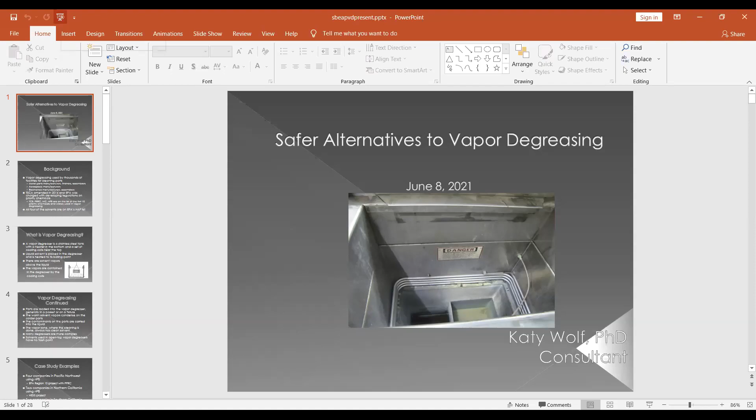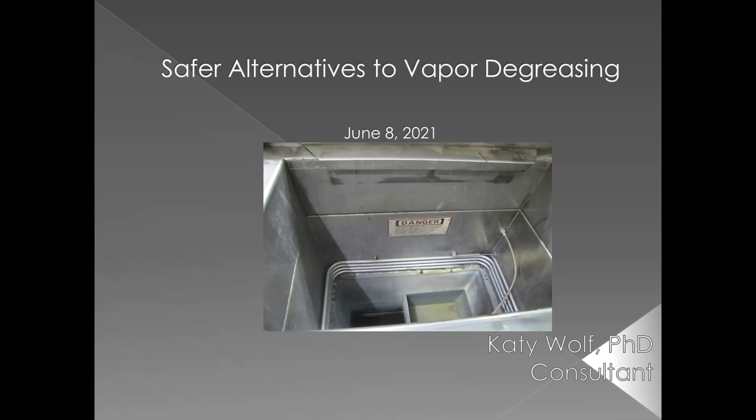So hi everybody. I'm going to talk to you today about safer alternatives to vapor degreasing. Now, vapor degreasing is a process that's used by numerous companies across the country for cleaning their parts. And the dominant industries that rely on vapor degreasing are metal parts manufacturers, finishers, and assemblers, as well as nearly all aerospace manufacturing. And in addition, several electronics manufacturers and assemblers also use vapor degreasing.

Now, in 2016, Congress amended the Toxic Substances Control Act. And under those amendments, EPA was charged with developing a list of chemicals that they believe posed a high risk. And they've developed the list of the first 10 priority chemicals. And on that list are 4 solvents that are extensively used in vapor degreasing.

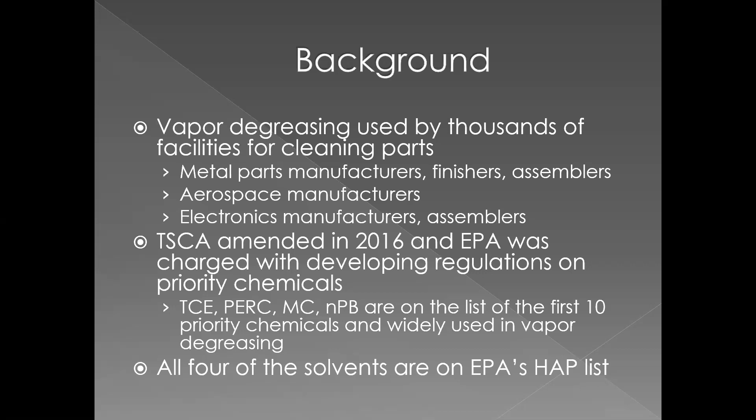These include trichloroethylene, or TCE, perchloroethylene, or PERC, methylene chloride, or MC, and n-propyl bromide, or NPB. And all 4 of these solvents are carcinogens, and they pose other health and environmental effects as well. And all of them are on EPA's hazardous air pollutants list.

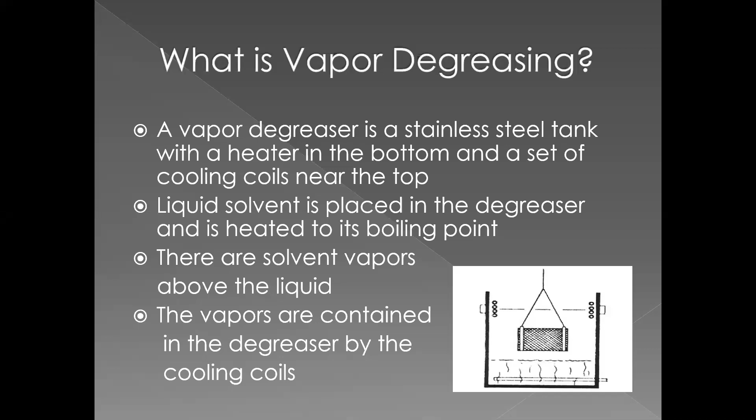Now, how does vapor degreasing work? Well, I'm just showing a simple schematic here, and a vapor degreaser is a stainless steel tank with a heater in the bottom and a set of cooling coils around the top. You put liquid solvent into the vapor degreaser and you heat it to its boiling point. That creates a vapor zone above the liquid zone. Those vapors would tend to escape from the vapor degreaser were it not for the cooling coils around the top, which hold those solvent vapors in them and keep them condensed.

Now you load parts into the vapor degreaser, most often in a basket, but sometimes also on fixtures of various kinds. And when the parts go into the vapor zone, they encounter the warm solvent vapors there. And those vapors condense on the colder parts and they carry the contaminants on them down into the liquid below. And if you always clean in the vapor zone, you'll always be cleaning with clean solvent.

Most degreasers are actually more complex than the simple view that I've given you right there. And almost all vapor degreasers have a spray wand that can be used to spray liquid solvent on the parts in the vapor zone. And in other cases, vapor degreasers will have baths of solvent with agitation of various kinds, and you can immerse the parts in them for better cleaning.

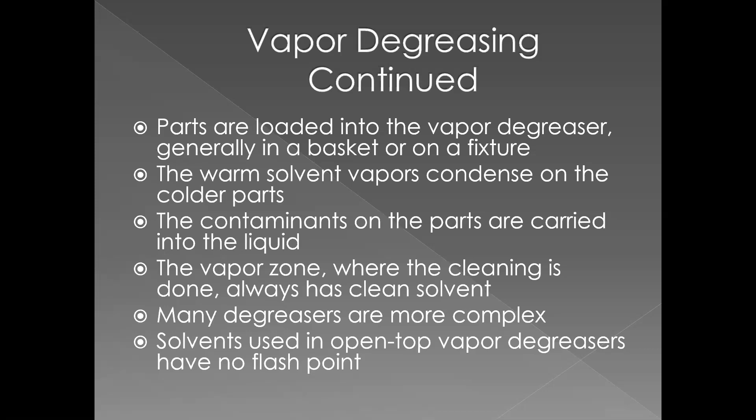Now, this last point is very important, and I want to emphasize it. The solvents that are used in open-top vapor degreasers can't have a flash point. If you heat a solvent to its boiling point and it has a flash point, you'll reach the flash point first. And since we have oxygen present in an open-top degreaser, if we also have a source of ignition, we could ignite that solvent or blow it up. So that's very dangerous. We don't want to use solvents with flash points in vapor degreasers.

Now I'm going to present a number of different case studies. I'm actually living in the Pacific Northwest, no longer in Southern California, and I'm working with 4 companies on a project that's sponsored by EPA Region 10. And I'm working with a nonprofit called the Pollution Prevention Resource Center. All 4 of these companies are using N-propylbromide in a vapor degreaser, and I'm assisting these companies all in converting to safer alternatives.

I'm working with 2 companies on a project sponsored by the Hazard Evaluation System and Information Service, which is part of the California Department of Public Health. And those 2 companies are also using N-propylbromide. Then historically, I ran a nonprofit in Southern California for 30 years, and I worked with a number of companies helping them to convert. And I'm going to present case studies on 2 of those.

Now, before I talk about what the potential alternatives are, I just want to give a historical context to the vapor degreasing process. Right after World War II, a solvent that I already mentioned, trichloroethylene, started being used. And then somewhat later, PERC and methylene chloride started to be used. By the time we hit the mid-1990s, there were 2 ozone depleting solvents, which were also extensively used by industry. These included 1,1,1-trichloroethane or TCA and a chlorofluorocarbon called CFC-113.

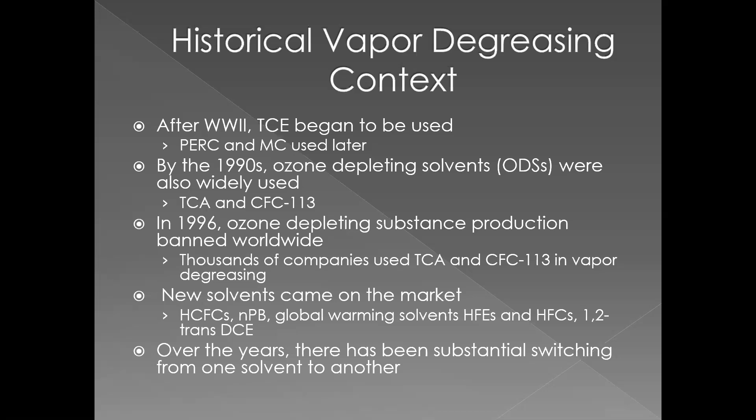Then a little later, some global warming solvents, the hydrofluoroethers and hydrofluorocarbons, came onto the market. And also another chlorinated solvent called 1,2-trans-dichloroethylene. And over the last, I don't know, 35 years, there's been a lot of switching from one solvent to another in vapor degreasing as the solvent that companies are using becomes increasingly regulated.

So what are the potential alternatives to these 4 halogenated solvents used in vapor degreasing? Well, one alternative is the fluorinated solvents, the hydrofluoroethers or hydrofluorocarbons. Now, the problem with these solvents is they do contribute to global warming, so they could ultimately be regulated for that reason. In addition, they don't clean very effectively, so virtually always they're combined with 1,2-trans-dichloroethylene to boost their cleaning capability. Now, 1,2-trans has not been tested for chronic toxicity, but it is structurally similar to TCE, PERC, and vinyl chloride, and those are all carcinogens. So 1,2-trans could ultimately be regulated for that reason.

The HFEs and HFCs are also extremely expensive, so they're almost never used in open top vapor degreasers where their emissions would be so high that the replacement costs would be onerous. So they're almost always used in airless airtight equipment. These would be things like vacuum degreasers, and those systems turn out to be very expensive. The smallest kind of vacuum degreaser you could ever buy would run you around $100,000, and most would be in the range of $400,000 to $1 million.

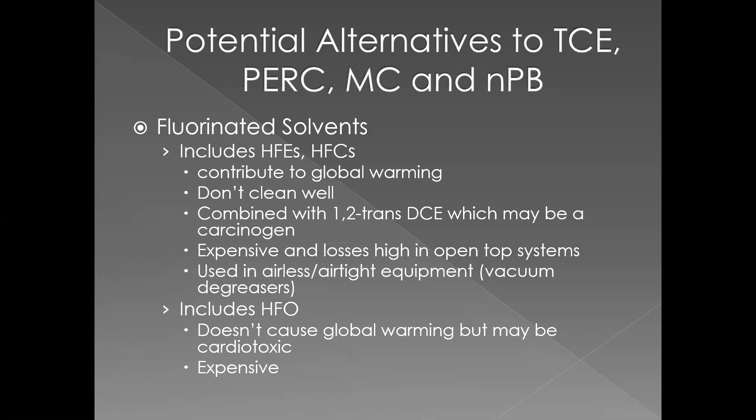Another fluorinated solvent is a hydrofluoroolefin. Now, it does not contribute to global warming, but a toxicologist in California has evaluated its toxicity and she believes it to be cardiotoxic. It's used in open top systems, but those systems are very expensive, as is the HFO.

Another potential alternative is to use solvents with flash points in vapor degreasing, and I've just listed several there. 1,2-trans is a solvent with a flash point. There are lots of oxygenated solvents like glycol ethers and modified alcohols, which have flash points, and hydrocarbon solvents, of course. These solvents can't be used in open top vapor degreasers, as I already mentioned, because of the presence of oxygen and the threat of a fire or explosion. So they have to be used in airless airtight systems, and again, that equipment is expensive.

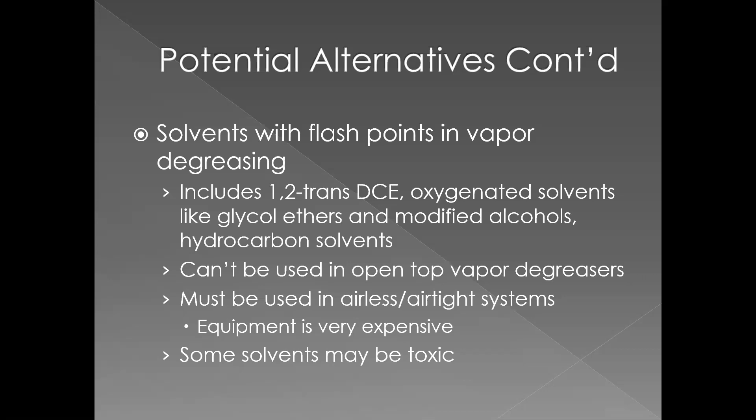And some of the solvents could be toxic. I already mentioned the problem with 1,2-trans-dichloroethylene. Certain glycol ethers have toxicity problems, and hydrocarbon solvents often contain aromatic components. Those would be things like benzene, toluene, and xylene, which are very toxic.

Another potential option is to use solvents with flash points in a cold cleaning operation, that is where you wouldn't heat them. And I've added a couple solvents to the list here. One is parachlorobenzotrifluoride, or PCBTF, and that turns out to be a carcinogen. Also, the volatile methyl siloxanes, one of those that is a solvent, D5, is also a carcinogen. And in addition, cold cleaning is not as effective as vapor degreasing in cleaning parts, so most people doing vapor degreasing might not find it an adequate process.

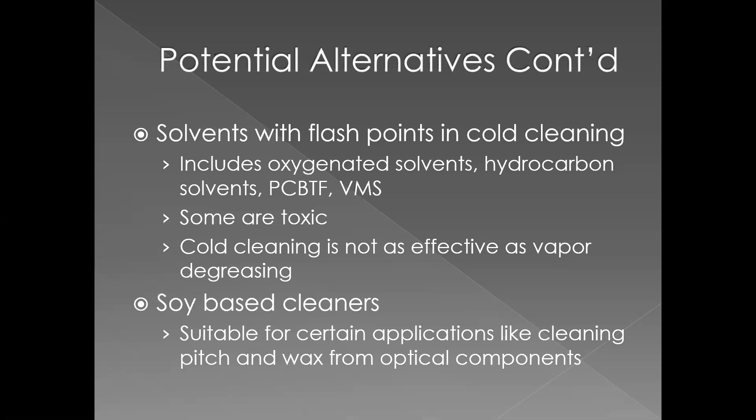Then I've separated out soy-based cleaners, and these are good for cleaning in certain applications. Companies who make optical components generally polish those components with materials like pitch and wax. And those are extremely difficult to remove, and soy-based cleaners can do that very effectively.

There are various other methods that can be used on a case-by-case basis. For example, some companies might be able to use a burn-off oven to decompose certain oils on their parts. Companies assembling printed circuit boards might be able to adopt a no clean flux, which means you wouldn't have to clean it off at all. And companies who are refurbishing heavily contaminated parts from the field might be able to use blasting media of various kinds to clean their parts.

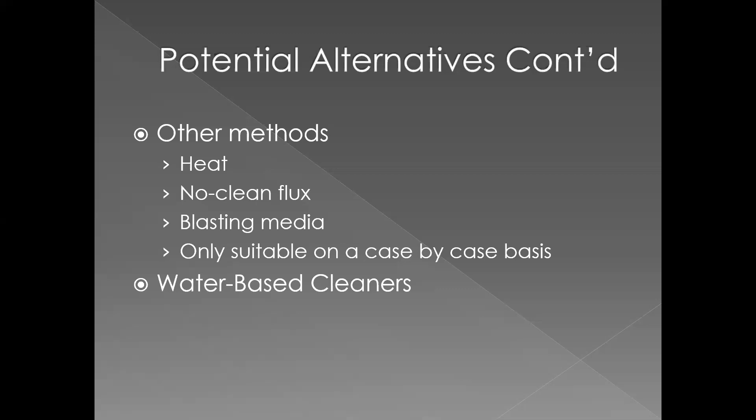Now, the last option I'll mention is water-based cleaners, and I'm going to talk a lot more about those in what else I have to say. So taking into account the health and environmental effects that I've mentioned, and some of the cost and technical feasibility issues, water-based cleaners are really the best option, and they're actually appropriate for almost all of the operations where vapor degreasing is used today. And as I also mentioned, soy-based cleaners and other safe methods might also be appropriate on a case-by-case basis.

Now, in my Pacific Northwest project, all of the facilities I'm working with, the 4 facilities, are converting to water-based cleaners. In my California facility project, 1 facility is converting to a soy-based process and the other to a water-based. And in the earlier projects I worked on in the LA area, both of the facilities I worked with ended up converting to water-based cleaners.

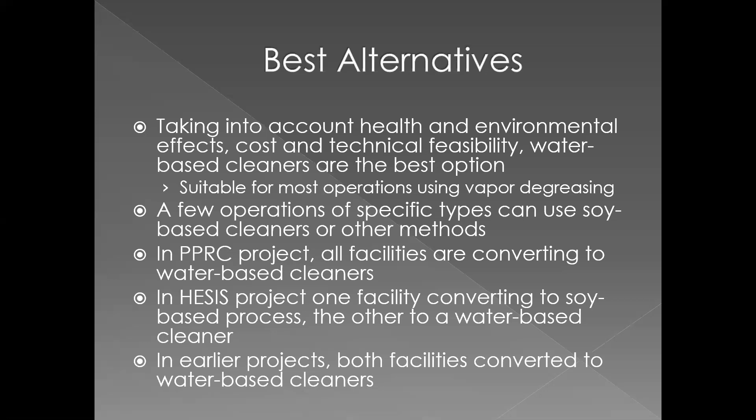Now, the first case study I'm going to talk about is a company called MAPSCO. They're an aerospace subcontractor in the Seattle area, and they offer non-destructive testing services. The type of non-destructive testing they do is magnetic particle inspection. The way that works is you have a fluid with magnetic particles in it. You put the parts you want to test into that fluid and you apply a magnetic field. If the part has a flaw or a crack in it, those magnetic particles will align along the flaw or crack. You can identify where it is and you can fix the part instead of getting rid of it.

So MAPSCO historically used a 130-gallon N-propylbromide degreaser for removing the oils from the parts when they came into the facility and also cleaning the non-destructive testing fluids afterward. We worked with a water cleaner supplier that was already supplying MAPSCO with a water-based cleaner in other operations in their facility, and MAPSCO wanted to convert to that water-based cleaner throughout if they could. So we did the testing in the type of equipment the company would need, and it worked well.

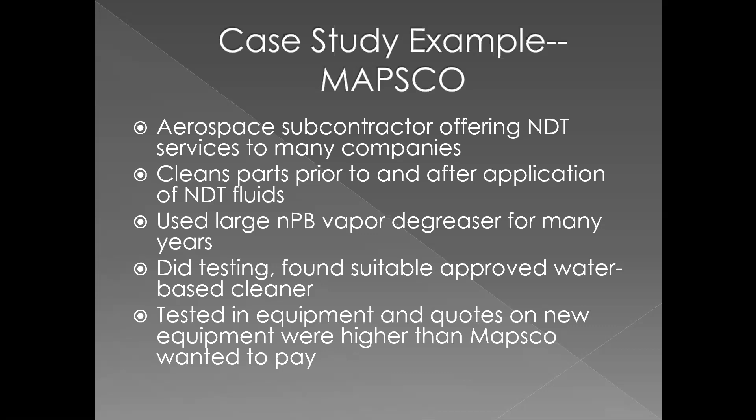Then I sent in an equipment supplier who had the type of immersion agitation equipment the company needed. He gave them a quote, and MAPSCO believed it was too high. That equipment supplier also represented a lower cost equipment line, and MAPSCO also felt that quote was too high. MAPSCO did find a secondhand system, but another company bought it first. So then I identified a company that had secondhand systems, and it turned out they had the exact type of system we had originally quoted for MAPSCO. MAPSCO ended up purchasing it and installing it. It's been there for almost a year now, and the system's working very well.

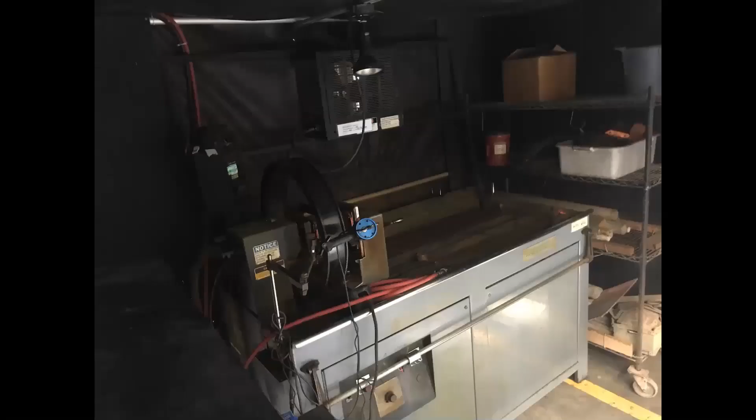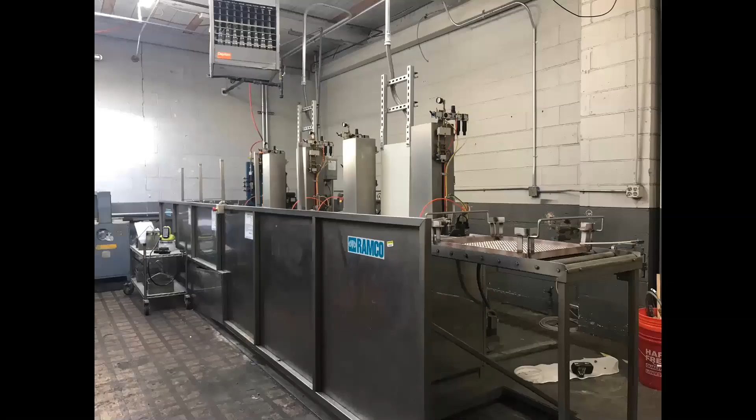And I don't generally include a capital cost for the vapor degreaser. Most people have very old, horrible vapor degreasers, and they've been fully paid off and amortized, so I don't consider that. In contrast, I do consider the capital cost of the water cleaning system. In this case, the cost of the water system was $55,000.

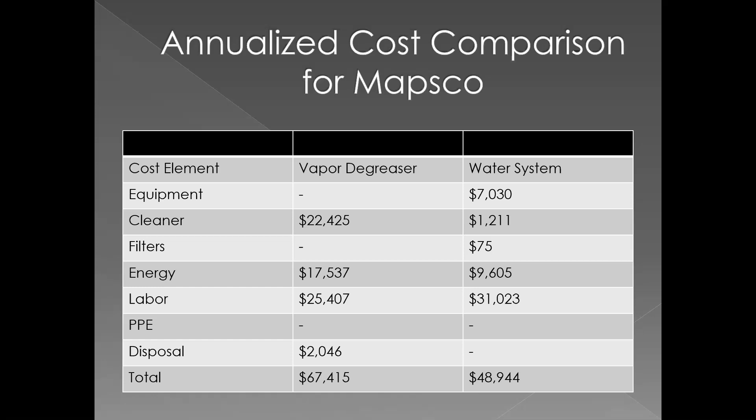Now, as you see, the total cost of using the vapor degreaser is a lot higher than the total cost of using the water cleaning system. MAPSCO was able to reduce their cost of cleaning by some 27% by moving to the water-based cleaner.

Now, another company I'm working with in my Pacific Northwest project manufactures small diameter tubing, 1/8 inch diameter and larger. And that tubing is used to transfer liquids and gases from one place to another in aircraft. Now, as you can see from the pictures of the tubes, some of them have multiple bends, and they're maybe 4 or 5 feet long in some cases. And the company uses a water-based lubricant in their bending operation. We worked with a water cleaner supplier and conducted testing, identified a water cleaner that worked well. And then I brought in an equipment supplier.

Now, the equipment supplier and I knew of another company that had very similar operations in Southern California. And a few years before, that company had converted to an ultrasonic cleaning system using a water-based cleaner. Now, we knew that ultrasonic systems are quite expensive, so we wanted to see if we could do the testing in a spray cabinet with a specially designed fixture that would hold the tubes in place while we sprayed cleaner on the inside. We did that testing, and the parts after the testing were sent back to the company. They cut them apart and they said that they were clean.

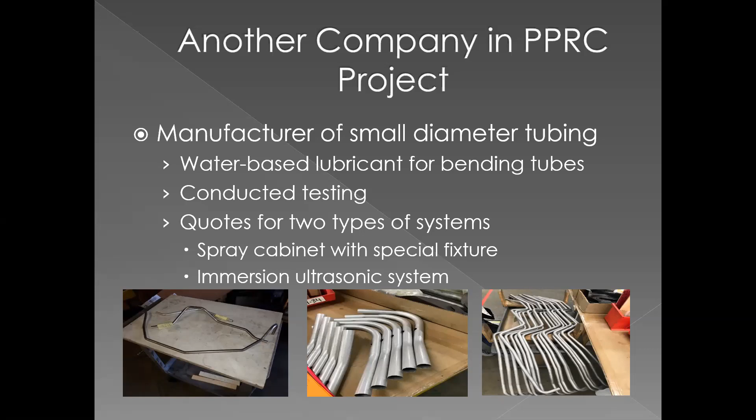So we gave 2 quotes to the company, one for the spray cabinet and another for the ultrasonic cleaning system. And as expected, the cost of using the spray cabinet was less than the cost of using the ultrasonic system. Another company I'm working with in the Pacific Northwest project manufactures ducting for aerospace and industrial applications.

And the company forms these ducts into various shapes, and they use forming lubricants that they then need to remove. And they've been using an N-propyl bromide degreaser to do that. They have a number of water cleaning systems in their facility, and they decided they wanted to convert them all to 1 or 2 at most. And so we're doing the testing on the parts that go through the vapor degreaser with 2 different water-based cleaners. And the company plans to ultimately use a cleaning system that they already have in place, an immersion agitation system. So we're not finished with that project yet.

I'm also working with a plating company in that project, and they have to remove polishing compound from their parts. Polishing compound is very difficult to remove, so they are going to need an ultrasonic cleaning system, which is an aggressive cleaning system, to do that. We tested some water-based cleaners with a cleaner supplier and found one that was suitable. And the company right now is evaluating what size of an ultrasonic system they want to purchase.

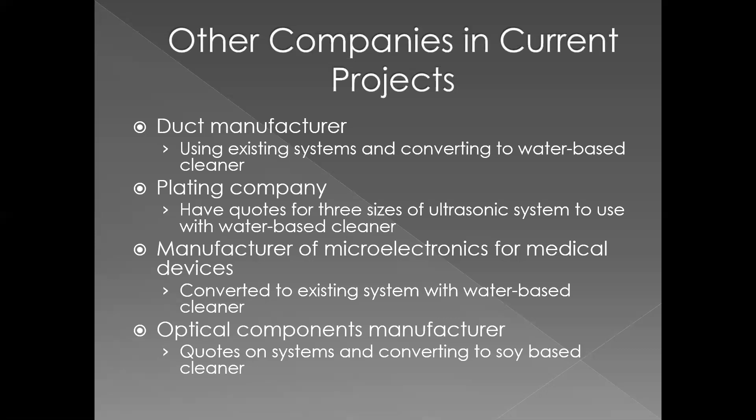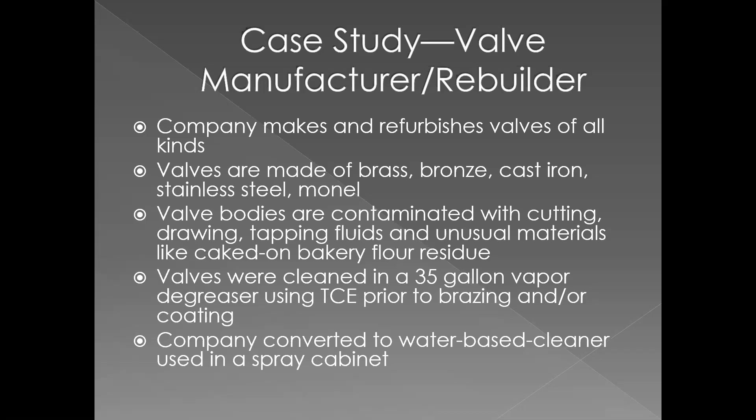Now, I'm just going to mention a couple other case studies in the Los Angeles area. One was a valve manufacturer. They refurbish valves, and they're made of all kinds of different substrates, which I list here on the slide. And they're largely contaminated with metalworking fluids from the field, but sometimes they have unusual materials on them, like the caked on bakery flour residue that I show here. And historically, the company used a 35-gallon open-top vapor degreaser for cleaning the parts prior to either a brazing or a coating operation. And we did testing, identified a water-based cleaner that worked, and we got equipment quotes, and the company converted to a spray cabinet.

Now, here's the annualized cost comparison for the valve company. And again, I amortized the cost over a 10-year life for the system using a 3% discount rate. And I don't show an equipment capital cost for the vapor degreaser. The cost of the system in this case, that spray cabinet, was $8,000, and that translates into $900 a year. Once again, as you see, the cost of using the halogenated solvent is a lot higher than the cost of using the water-based cleaner. In this case, because it's a gross cleaning operation, we have to change out the water cleaning baths much more often, every month and a half. And so the cleaner cost is higher in the case of the vapor degreaser.

The energy cost in this case is higher for the use of the water cleaning system. That's because the spray cabinet is partially automated. Now, as you see, we have decided that the labor costs did not increase with the use of the water cleaning system. It's the same. And once again, the disposal cost for the halogenated solvent is higher than the disposal cost for the spent water cleaner. And in this case, they're shipping it off-site for disposal.

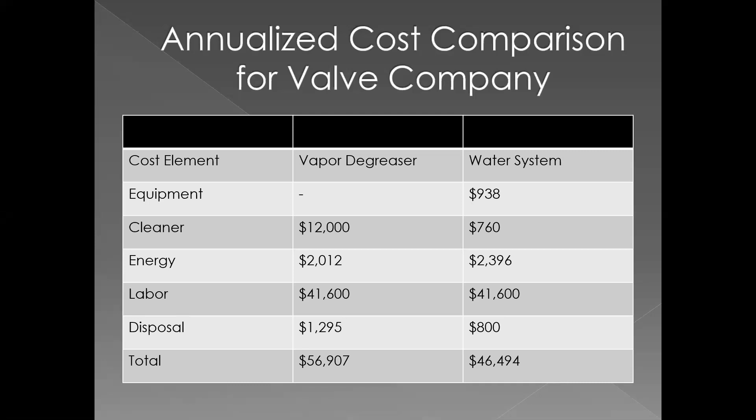Now, this last case study manufactures nameplates, and 90% of their nameplates are made of aluminum, and the balance are made of stainless steel and brass. And they bring the nameplate stock into the facility, and they have a protective oil coating. They then processed them through a 50-gallon open-top degreaser, and they cleaned a huge volume of parts, about 1,000 of the nameplate stock per day.

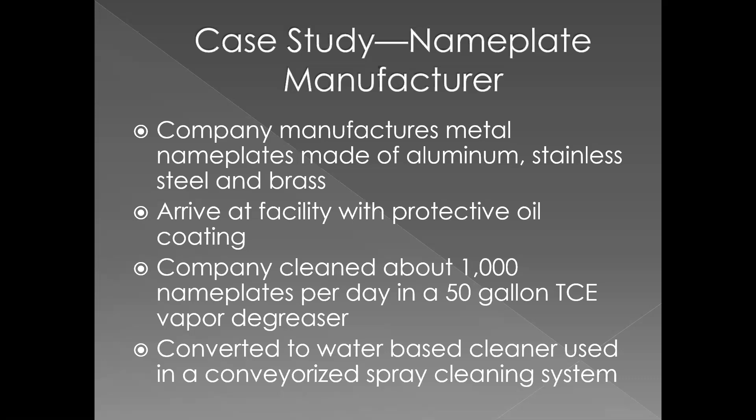It goes through 3 chambers: a wash chamber where water-based cleaner is sprayed onto the parts at high pressure, about 120 PSI. It goes through a spray rinse and then through a dryer. And the rinse in this case is a recirculating rinse. And it goes out the other end on the conveyor belt, and the parts are clean and dry.

Now, once again, as you see, the cost of the cleaner in the case of the vapor degreasing system is higher than the cost of the water cleaner. In this case as well, because we're cleaning such a high volume of parts, we need to change out the bath every month and a half or so.

Now, in this case, the energy cost of using the water cleaning system is much higher than the energy cost of using the vapor degreaser. That's because we've almost completely fully automated the cleaning process. And automation is very energy intensive. Now, in contrast, we've reduced the labor involved in the water cleaning process. Again, the automation helps us to do that.

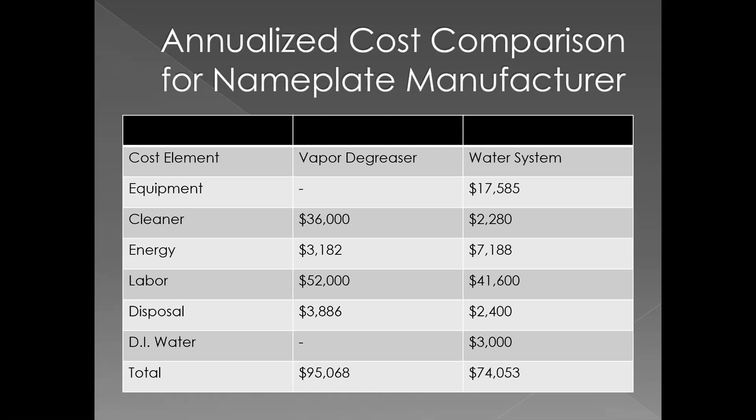Now, you will ask, is the cost of using the vapor degreaser always higher? And the answer is no. In some cases, the cost of using the water cleaning system will be higher. The tube manufacturer that I mentioned, they're going to have a higher cost for converting to the water cleaner, but mostly the costs for the water cleaning systems are lower.